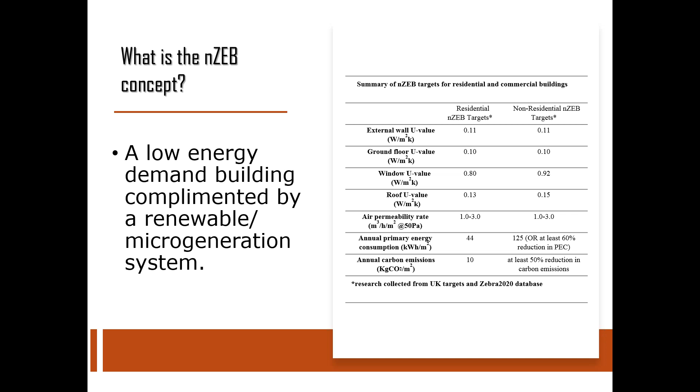The reason we collected 3 years worth of energy consumption data was to normalize the value in case we had a particular hot summer or cold winter, and then we used the result for validation of the model.

Then we used this data with the software to build a holistic baseline model, and incorporated the CIBSE weather data. We used the design summer year weather file for overheating analysis, and the test reference year for energy analysis and compliance with UK building regulations.

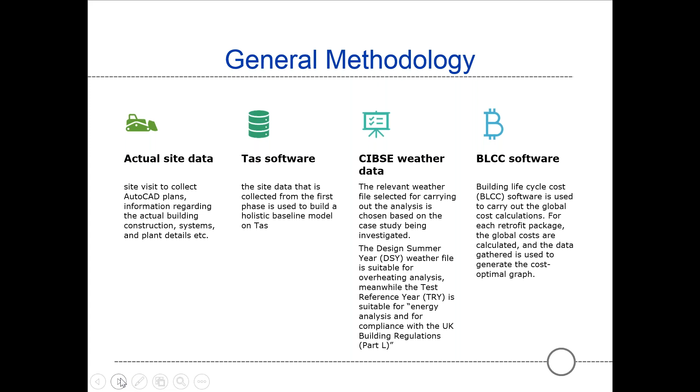So coming to the first case study, the first case study investigated was a residential dwelling located in Bracknell, Berkshire. The dwelling is a typical pre-1990s building, and the building regulations it was built to are well below today's standards, making it more challenging to retrofit, as it typically requires more energy efficient measures, or EEMs, to be incorporated before the energy demand is lower.

We used 10 different retrofit scenarios to investigate the life cycle cost analysis. We also used a sensitivity analysis, and finally, we performed a cost optimal solution.

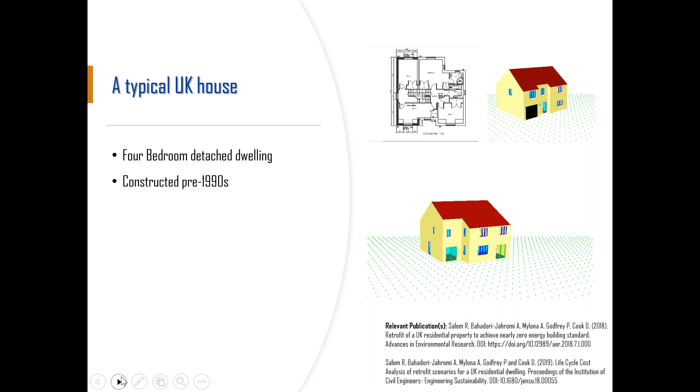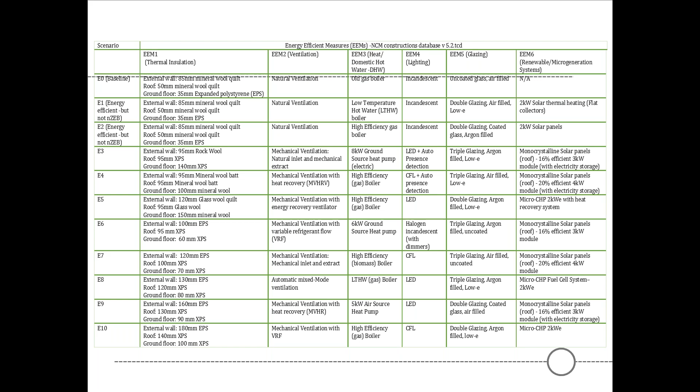Per Energy Performance of Building Directive guidelines, or EPBD guidelines, individual energy efficient measures, or EEMs, were selected and then grouped into retrofit packages or sets, as we can see in a table.

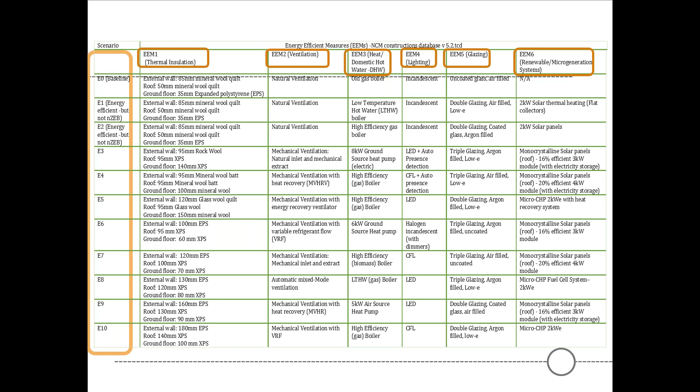These sets are the retrofit scenarios of the dwelling, with one scenario being the existing state of the dwelling, which we refer to as E0, or baseline. Areas of focus for retrofit are categorized as thermal insulation, heating, air ventilation and cooling, lighting, glazing, and renewable and micro generation systems.

On a purely energy target basis, it seems that E10 is the best solution. Scenarios E1 and E2 were specifically selected to provide an improvement from the baseline scenario, but not meet the NZEB target. The reason we did that is because incorporation of such scenarios provides an interesting comparison against the NZEB options, due to the large difference in initial investment costs.

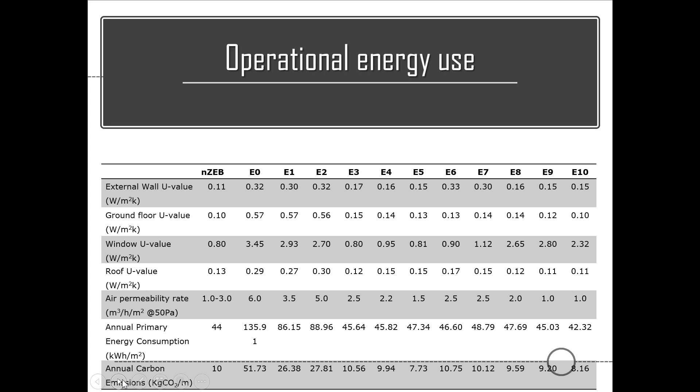The comparison of the cost contribution of the different elements of life cycle costs shows that for scenario E3 to E10, the capital investment costs are the most significant costs over the 30 years calculation period.

In comparison, the most significant cost in E0, the baseline, and E1 and E2, which were slight improvements compared to the baseline, is the energy cost. It is unsurprising to see that the baseline scenario has the highest annual energy cost compared to all other scenarios.

The total life cycle cost of the different scenarios is lower than the baseline scenario over the 30 years study period. This means that regardless of which scenario is selected for retrofitting, the selected scenario is in fact cost effective. In other words, not retrofitting the property is the most expensive option and least profitable over the 30 years calculation period.

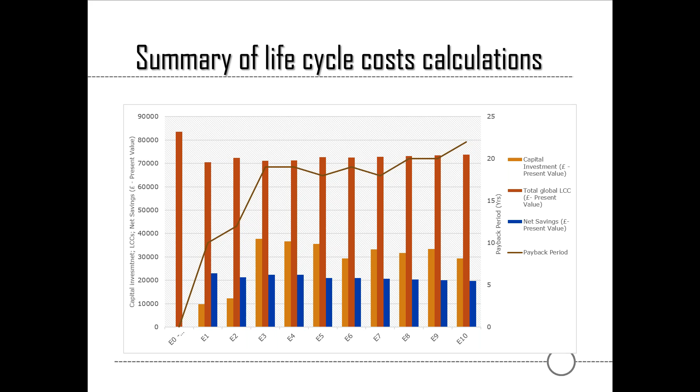Then we considered the effect of varying the weather file. As we know, the weather is changing, and we looked at 2020, 2050, and 2080. The scenarios were simulated under future climate projections to see the effect of implementing NZEB retrofit under potentially different climatic conditions.

Meanwhile, for scenarios E1 and E2, there is a slight increase in the net saving. This is because the projections showed a continuous increase in temperatures over the stipulated timeline, which led to an increase in energy consumption.

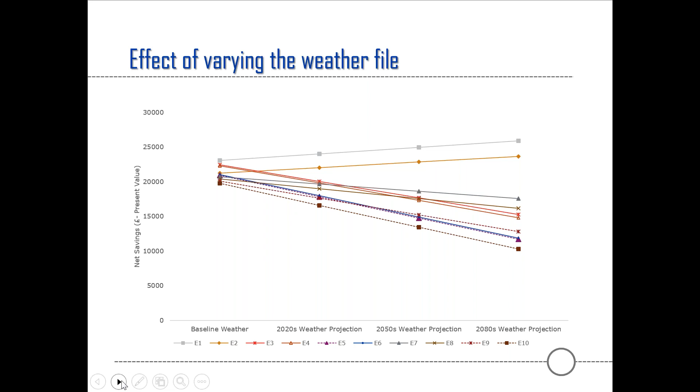We also investigated the effect of the fuel cost - what will happen if the fuel price increases, and what will happen if the fuel price decreases over the future years. For all these 10 scenarios, this is investigated, as you can see from E1 to E10.

Then we look at the decrease of the fuel price. A decrease in fuel price by 2.5% and more will cause the NZEB scenario to become uneconomical. This is because the life cycle cost of the E0 scenario, or baseline, decreased significantly.

I'm aware that at the moment, because of the current situation, the price of fuel is dropping, but it's unlikely that this is a sustainable scenario, and probably within 6 or 7 months that will pass. So our assumption is that it's very unlikely the fuel price will experience any significant reduction compared to the current price.

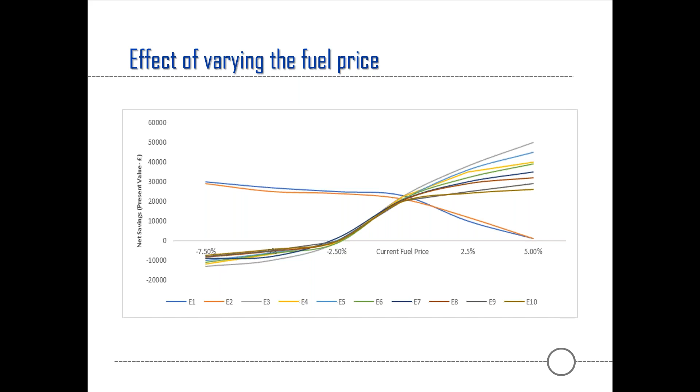So the simplest way to bridge this gap would be to improve the rate for the currently available incentive schemes, and possibly introduce a new one like the one government introduced yesterday. This sort of incentive could reduce the gap between the cost optimal and the actual NZEB target.

In real life application, the cost optimal solution will largely depend on the requirements of the investor. However, the same step of creating several retrofit scenarios and comparing them is key to reaching the NZEB standard with cost optimal level.

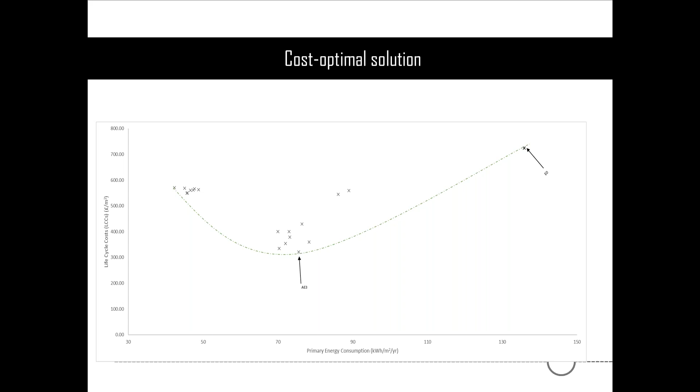We are moving now to the second case study, which looks at overheating. The second case study analyzed is the retirement village in High Wycombe, and the overheating criteria utilized is the CIBSE TM59 design methodology for the assessment of overheating risk in homes.

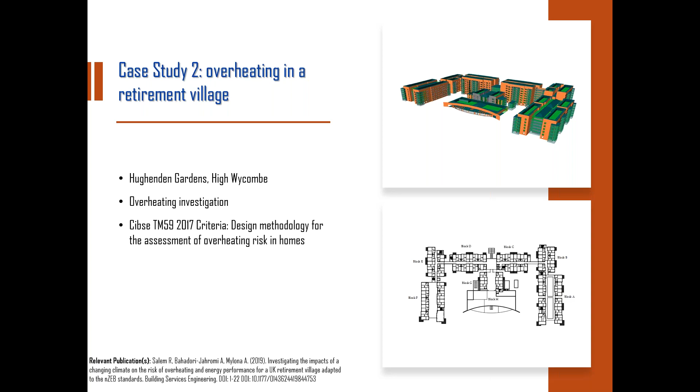So briefly, if we go through the case study summary, here we have the case study details, which is made of 8 blocks from A to H, and flats within the village have an average of 2 occupants per dwelling. Flat occupancy type is split into 70% residential occupancy and 30% nursing occupancy.

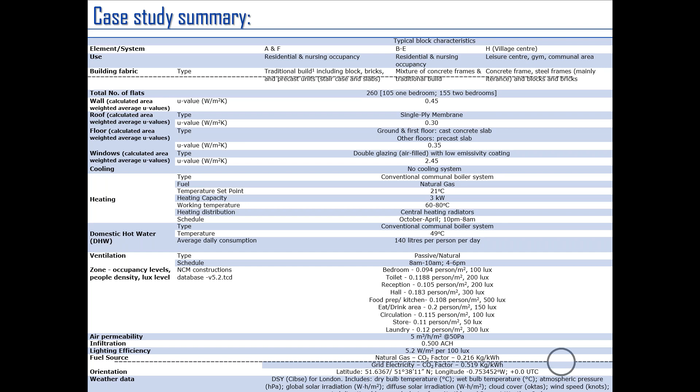The aim of this investigation was to assess how the case study building performs under current and future climatic conditions, as it currently is, and once it is retrofitted to the NZEB standards.

We also look at the current literature. From the currently available literature, it could be predicted that NZEBs and energy efficient buildings are more likely to experience overheating.

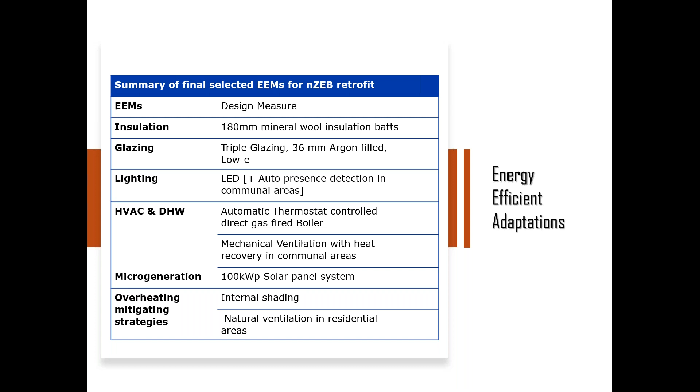Findings from the literature also suggest that incorporating shading devices, double glazing as opposed to triple glazing, and utilizing natural ventilation are currently some of the most effective ways to mitigate the risk of overheating. These measures were therefore incorporated as part of the NZEB retrofit of this retirement village to see if it's possible to mitigate overheating by considering these factors.

We can see that the space heating primary energy consumption decreases for both the baseline scenario and even more for the NZEB retrofit, as future timeline scenarios are simulated.

Although the total primary energy consumption for the NZEB scenario under the future weather projection remains lower than the baseline scenario, it can still be said that the NZEB scenario underperforms.

If you look at the figures for present NZEB, 2050, and 2080, you could see that gradually the energy consumption is actually increasing.

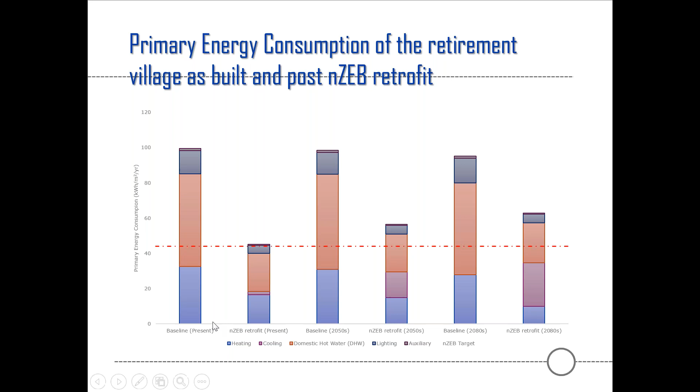Unfortunately, the typically recommended mitigation strategies, meaning using shading, using natural ventilation, using double glazing instead of triple glazing, weren't sufficient to reduce the occurrence and severity of overheating throughout this particular building.

Severe overheating is experienced under the 2050 and 2080 weather projections for the NZEB scenario in comparison to the baseline scenario. The kitchen and bedroom are more prone to experience severe overheating, with temperature exceeding 35 Celsius.

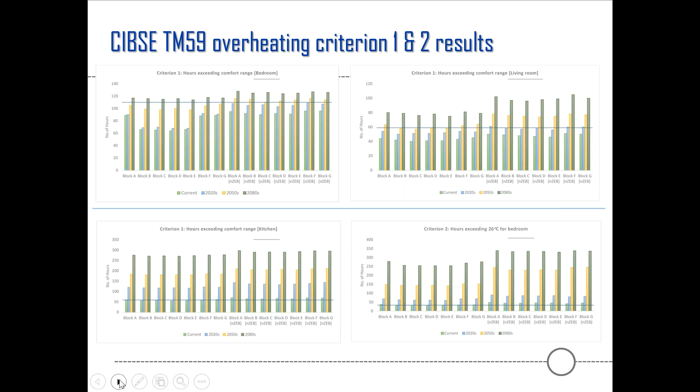So as one mitigating option, a 100 kilowatt combined heat and power system, and then a combined cooling, heating and power system, were simulated as part of the NZEB retrofit package to see whether they could potentially act as a solution for this overheating scenario.

With the CHP system in place, the building continues to overheat in exactly the same way as it did, whilst the other measures were incorporated.

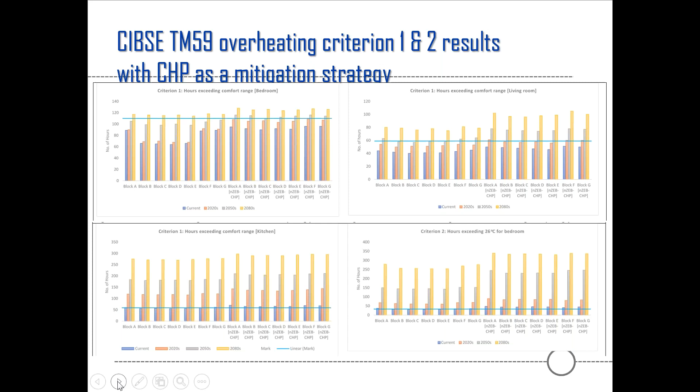However, when we incorporate the CCHP system, it was able to ensure that the building doesn't fail the overheating criteria under the current 2020, 2050, and 2080 weather database.

Out of the mitigating strategies that have been checked, the incorporation of the CCHP system was the only alternative that meant the building passes the criteria.

Moreover, the baseline building's bedroom and kitchen failed to pass the TM59 overheating criteria, meaning the CCHP alternative was once again the only mitigating strategy that fully passed the overheating criteria.

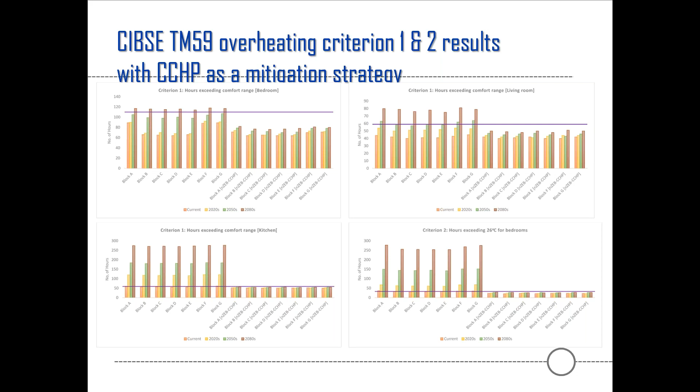But more importantly, they both maintain the primary energy consumption so that it meets the required NZEB standard under their future climatic projections.

So this itself is an improvement from the previous set of results, where the NZEB target was exceeded under the future projection.

Despite the significant improvement that the CCHP system provides, there are problems associated with the use of CCHP during the summer within cities such as London. This is primarily due to the extra firing of boilers and pumping heat into the air to cool the building, which adds to the urban heat island effect.

Because of that, we are not recommending that as a solution for every scenario. The types of mitigation strategy will vary depending on the type, location, heating and cooling demand of the building, and various other factors.

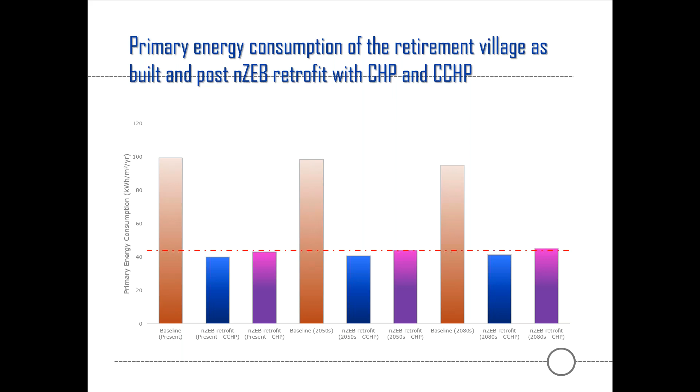Hello, Radwa here. Just to get straight into it, the third case study that we looked at was Hilton Edinburgh Grosvenor. It is an older building, constructed in the 1860s, and it has listed buildings consent, meaning it's of special heritage value or interest. That just makes the retrofitting process a bit more challenging because it narrows down the sort of energy efficient measures that we could apply.

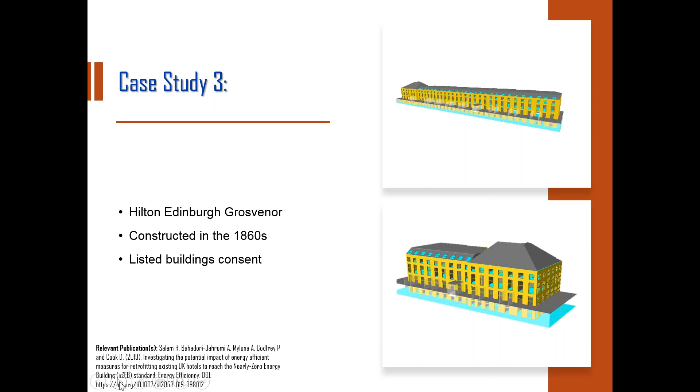But with simulation models, the accuracy of the results is going to depend on factors such as the weather data, for example, which should really replicate the microclimate of the building's location. This is very challenging to achieve, and it will always lead to some variation.

Also, for this particular building, we did some more research and found that buildings constructed from stone walls, across the literature, seem to have evidence of better thermal performance than obtained from computational models. The reason for this is that whilst computational models tend to consider stone walls as monolithic, in reality, your proportion of stone, mortar, and air gaps is going to vary, and this in turn will obviously have an effect on the overall simulated energy consumption.

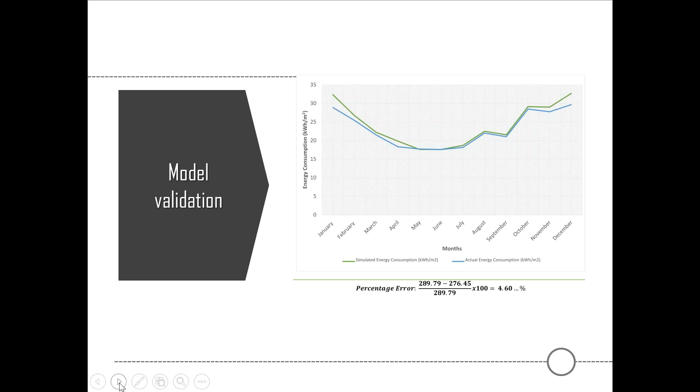All of these were initially implemented individually on the building, and where applicable, various sizes have also been trialed. For example, for sheep's wool, it says 100 to 200 millimeters, which means we trialed 100, 120, and so on, as you will see in the next slide.

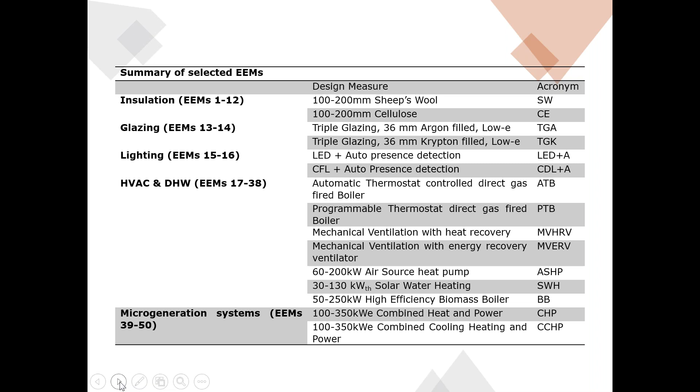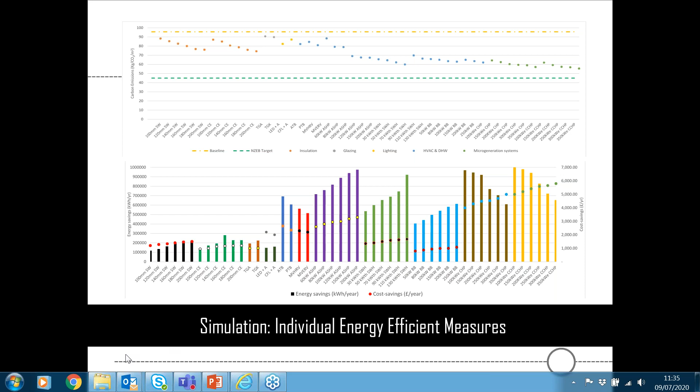The next figure on the slide is showing us the energy savings against the cost savings. Generally, the energy and cost savings were the lowest for the insulation, lighting, and glazing. For most measures, the energy and cost savings were positively correlated, so measures with higher energy savings also ended up having high cost savings. But for certain measures, for example the biomass boiler, it had much larger energy savings than its cost savings, and then mechanical ventilation, for example, had little energy savings in comparison to its cost savings.

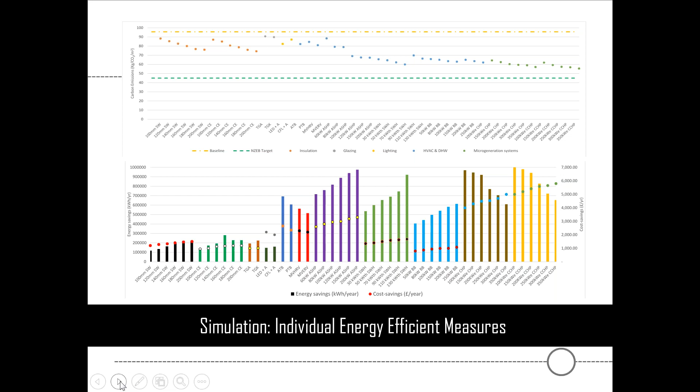So the main takeaway from the previous two slides is that none of those measures were able to completely reduce any of the indicators to meet our required target. Implementing the measures separately tells us that to reach the NZEB standard, we need several measures to be implemented together. So the next phase of analysis involved implementing different combinations of energy efficient measures until the NZEB target is reached.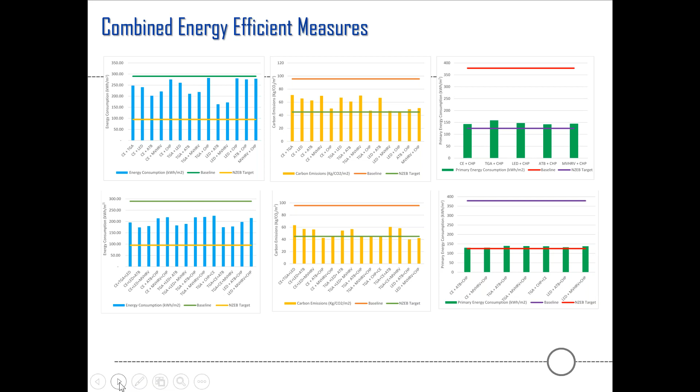For this case study, and for NZEBs in general, we're using primary energy consumption as our main indicator. The reason for this is because Annex 1 of the EPBD stated that the energy performance of a building needs to be expressed in a transparent manner, with a very clear definition, and it needs to have a numeric indicator of primary energy use. They also stressed that whilst you can use other indicators, you can't neglect setting a specific value for primary energy consumption.

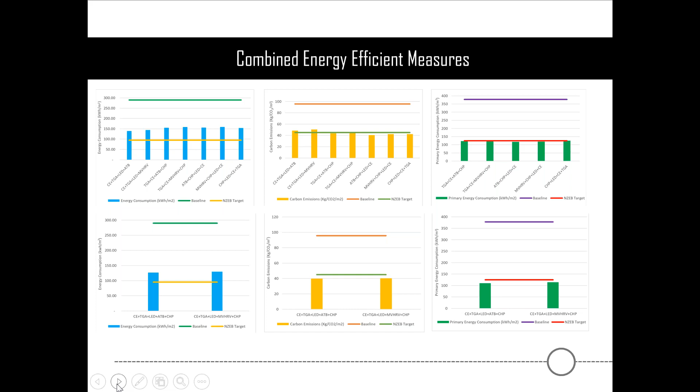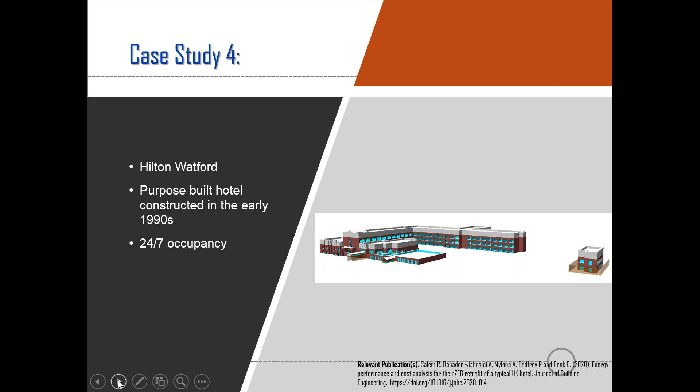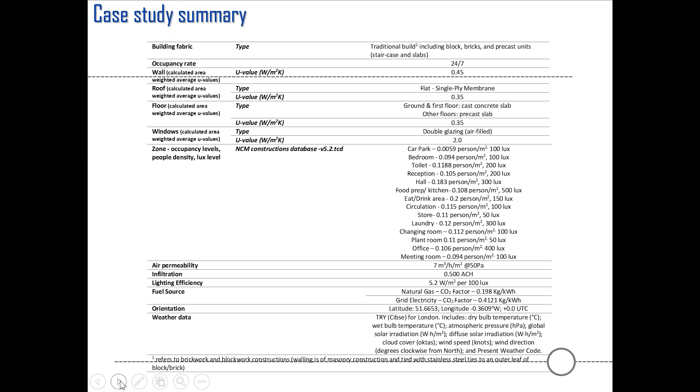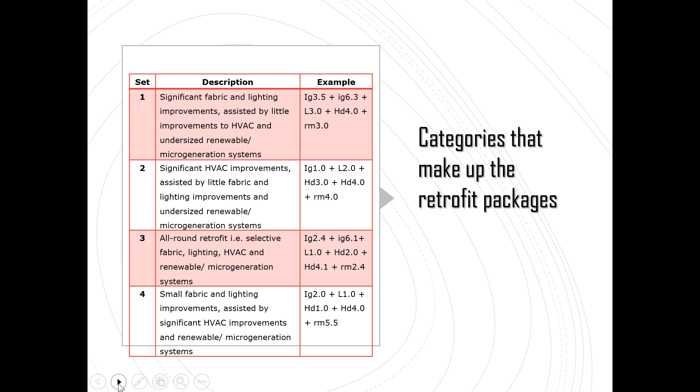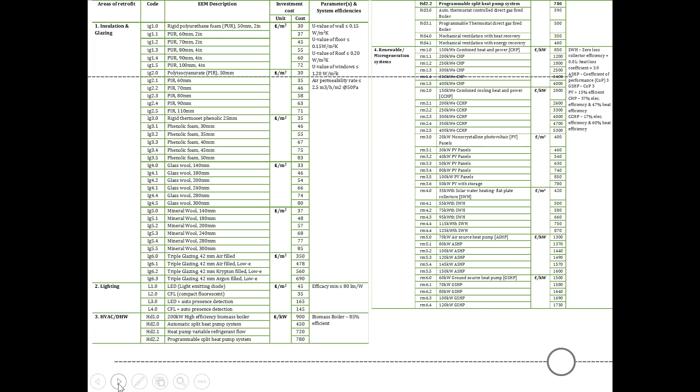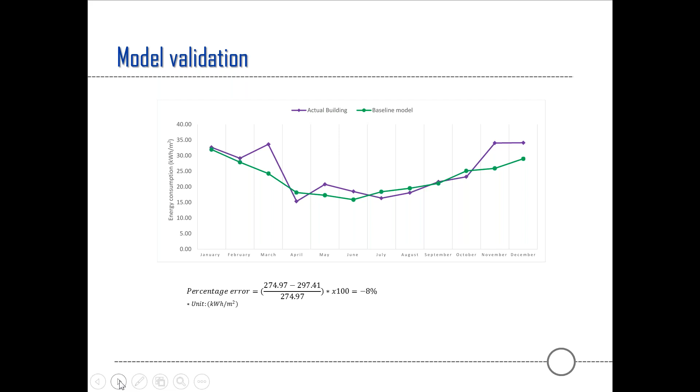But when we compared the annual actual energy consumption of 2018 to the actual annual energy consumption of the previous 2 years for the hotel, we found that the difference in the total was less than 5%. So it didn't really matter which year we selected, because it didn't have any effect on the results or the validation of the model. But what this tells us is that possibly the hotel's current energy consumption is affected by other factors and activities that are not necessarily weather dependent - also possibly that the hotel's energy management could be improved upon.

Here we're looking at our primary energy consumption and carbon dioxide emissions with our retrofit packages. As I said, it's 4 different sets of categories, and within each category we have 46 packages. We're comparing this to our baseline indicator and our NZEB target.

Adopting the methodology where different retrofit packages focused on different potential retrofit aspects really showed us, or proved to us, that a whole building retrofit is the best route to achieving the NZEB standard. When you prioritize one aspect and neglect another, it leads to an incomplete retrofit that either doesn't lower your energy demand or doesn't improve and optimize the overall energy efficiency of the building systems, components, and so on.

Also, it's not just about selecting a range of energy efficient measures that tick off the standard, but selecting suitable energy efficient measures. Suitability always depends on the baseline building - its current energy demand, usage, occupancy, and so on. For example, for this case study, the most compatible packages were the ones that offered a balance between the heating and cooling needs during the heating and non-heating season. Packages that only focused on meeting the heating needs underperformed at reducing the primary energy consumption.

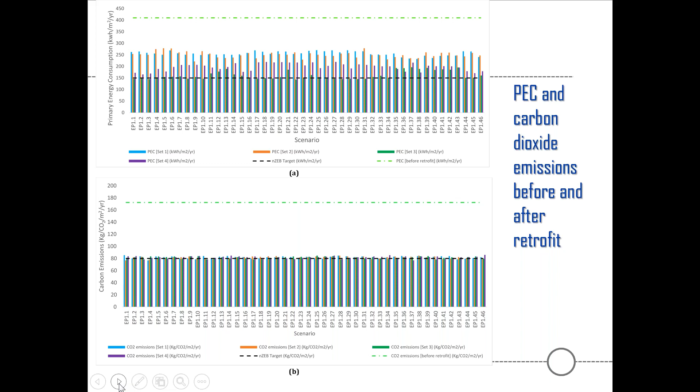Unfortunately, once again, there was a 30% gap between the cost optimal solution and the NZEB target. It might just be that, with the current level and price of technologies, especially for retrofitting, finding a balance between the energy and cost benefits is necessary. Even small changes in the type of measure selected, for example, rather than selecting 110 millimeter of a certain insulation, you can select 80 millimeter, will help in reducing the global costs and bridging that gap.

Another thing is that we have to remember that buildings are dynamic and not static, and at certain points they're always going to need old components to be replaced. So we need to raise awareness and educate stakeholders, landlords, that these points should be seen as an opportunity for improvement rather than just a like-for-like replacement. In this way, you can have an energy efficient building that's achieved over several stages rather than at once, because one of the main barriers to reaching the NZEB standard is usually the very large investment costs.

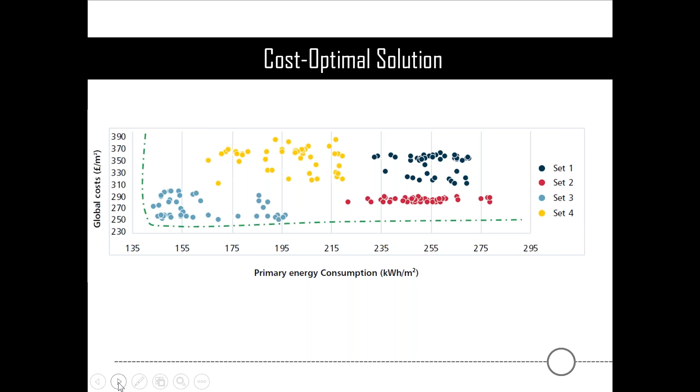So just some concluding remarks to finish this off. Some of the work that we've presented here proposes some of the first steps, and I guess cautions, towards how we can effectively begin to include the concept of NZEBs within the current UK building stock.

And the approach undertaken needs to be considered carefully. It's very important that we understand the risk, because if we don't, it will be down to luck whether or not these energy efficient buildings are going to continue performing to the same standard many years down the line. So buildings need to be future proofed.

The cost optimal solution is something that needs to ideally represent the best combination of energy and cost performance. It's very important to strike a balance between the two. If you plan something that's just focused on lowering the cost, then you're not going to meet the NZEB target. And likewise, focusing on just meeting the NZEB target with the current level and cost of technologies will mean that the solution is economically unfeasible.

And the reason why we're stressing so much about economic feasibility of these retrofit packages is because the EPBD stated that in cases where you conduct a life cycle cost analysis and it proves to be negative rather than positive, then you don't actually need to apply the NZEB standard.

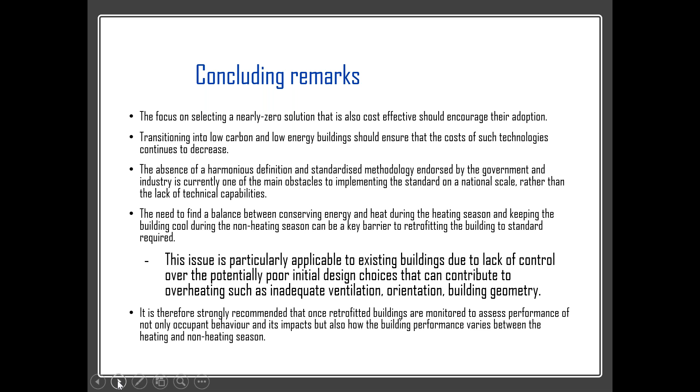But when it comes to retrofitting, it's a bit different. Overall, the technology is there to deliver energy efficient homes. Regulations around ventilation and overheating and all of that need to keep up with those improvements in the energy efficiency of buildings as well. And we do need a more coordinated approach to the requirements for energy and ventilation in buildings. That's all, thank you very much for listening.